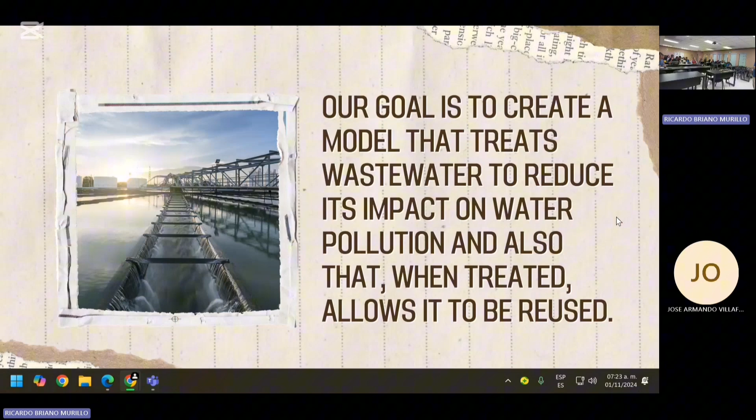Our goal is basically to create a model that treats wastewater, reducing the impact on water pollution, and also, with this treatment, allowing the water to be reused.

Our proposal is basically a model that consists of a barrel-like structure with different levels, which will be placed in the sewer. The first level is where solid waste will remain and will be diversified so that each type of waste goes directly to a plant specialized in dealing with that waste.

Methodology: our model is designed to carry out partial filtration and decontamination. It's divided into 4 sections within a cylinder and sewers in which different processes will take place.

In section 1, what happens is the filtration of the water, both human and plastic waste and any other waste.

In section 2, the water will pass to the cylinder container where it will be left to rest, and some bacteria begin to purify the water.

In section 3, they will use a natural coagulant to generate a homogeneous substance, which will get filtration. And section 4 is the last one.

Here, finally, a controlled dose of chlorine will kill the remaining bacteria.

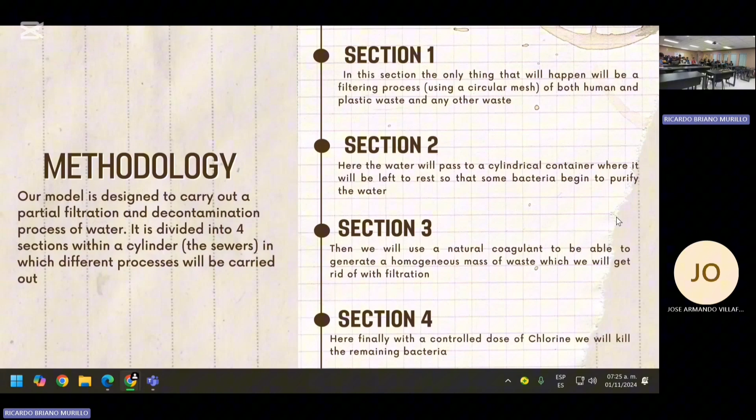This is related to the subject of chemistry because it involves a chemical process. In this process, we use coagulants, which are chemical materials that are used in water treatment.

In the water, the coagulant discharges colloidal particles, resulting in the formation of larger media which settle more quickly. Coagulants for water treatment consist of positively charged molecules that, when added to water, neutralize the present charge. Organic coagulants are generally used when necessary to reduce sludge generation.

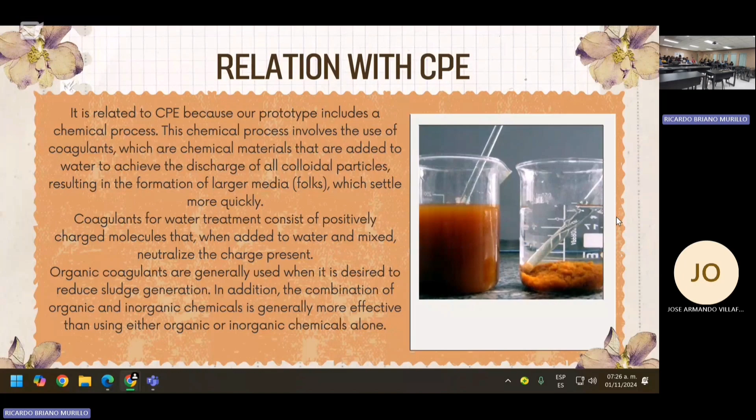In addition, the combination of organic and inorganic chemicals is generally more effective than using either alone. Also, coagulants have some benefits like a wide pH and alkalinity range, comparative volumes for reduced uses, and ease of storage, etc.

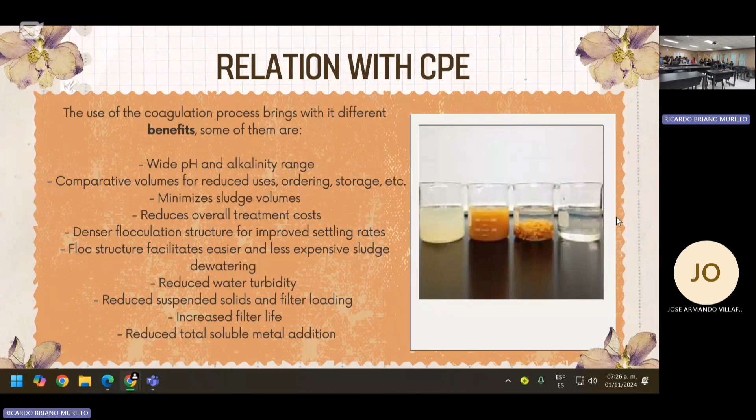They minimize sludge volumes, reduce overall treatment costs, improve floc structure for improved settling rates, facilitate easier and less expensive sludge dewatering, reduce water turbidity and solids in filtered effluent, and also increase filter life and improve overall water quality.

Relation with function.

We consider our project is related to some mathematical methods to obtain results, como it has variables we will use different formulas.

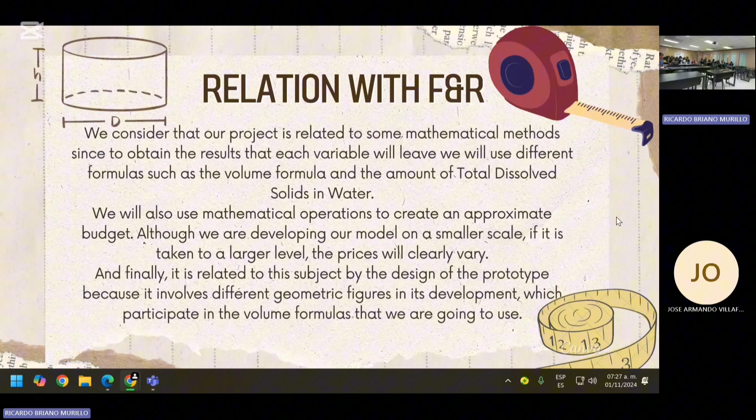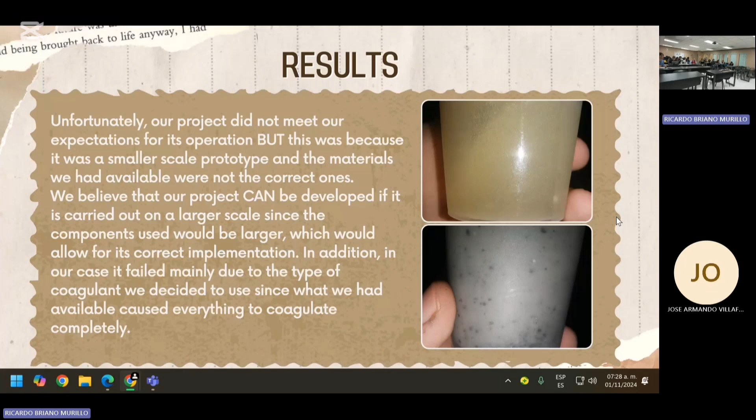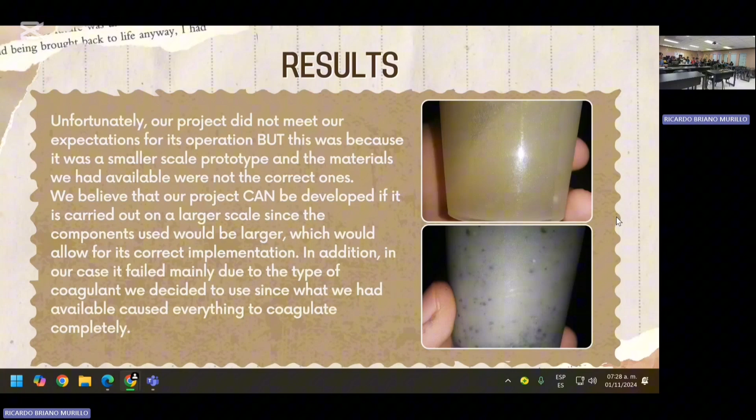I think that our project is applicable in a real context. Well, it could be applicable in a real context.

It would be more convenient and economical because the things that determine the cost of the development of plants, like the location, the capacity of storage, and other things, our project is part of the process.

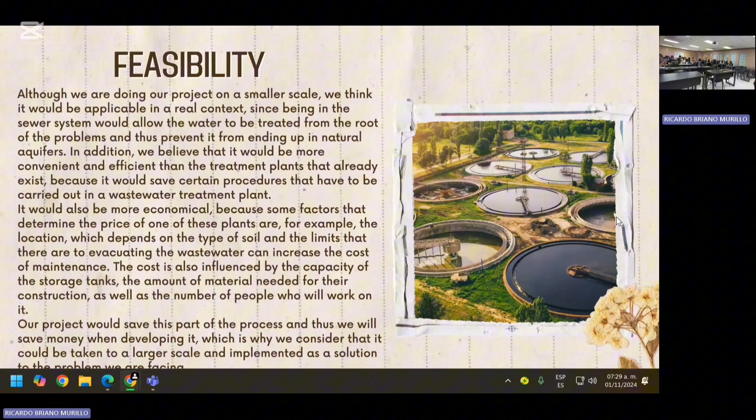Of the lakes or river, some of the people, some people have infection from the water.

And we know that this water is not for human consumption, but this will decrease the percentage of the infection.

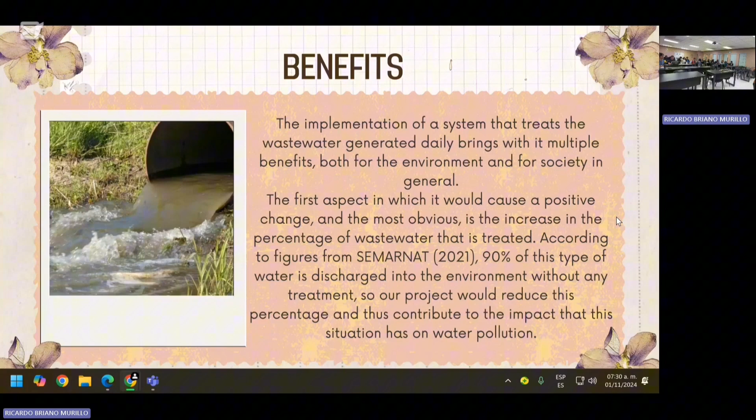The improvement of the project: we consider improving the time efficiency of the project, and also it could be less cost and...

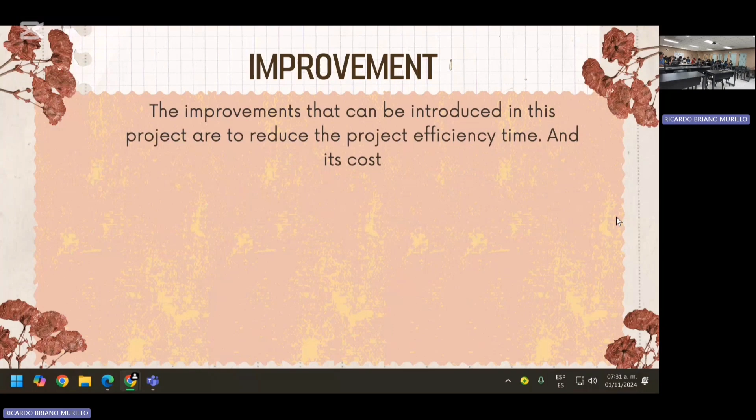This project will teach different things, mainly about the treatment of water, and we consider it important because...

In my street there are a lot of problems about the waste of water, and so I consider this project could be implemented in my street.

And also we use to compare our project too. In addition, thanks to the research, we learned what percentage of the wastewater really affects the aquifers and how this brings consequences for the household.

And finally, we learned about natural and inorganic coagulants and how they should be applied correctly to be used in wastewater treatment.

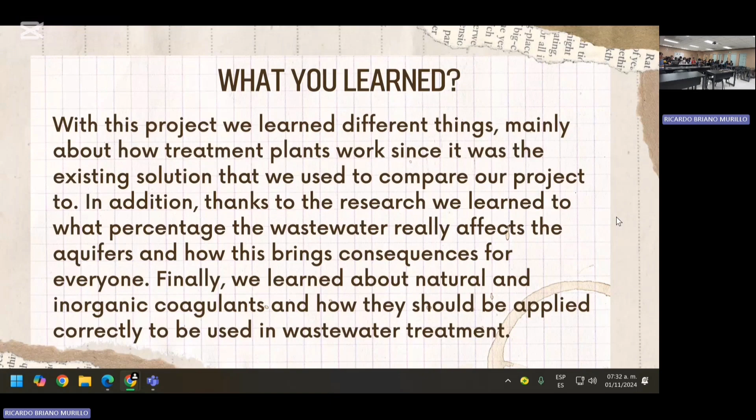Difficulties of the project: the difficulties of the project were the time to do the prototype, because the short time to do the project could cause a lot of stress for the team, and so this is a difficulty.

We hoped that the result would change in some cases, but this did not happen due to lack of time. This aspect could not be improved.